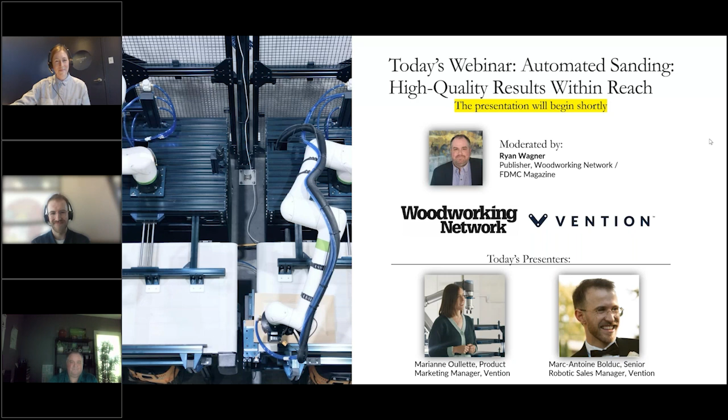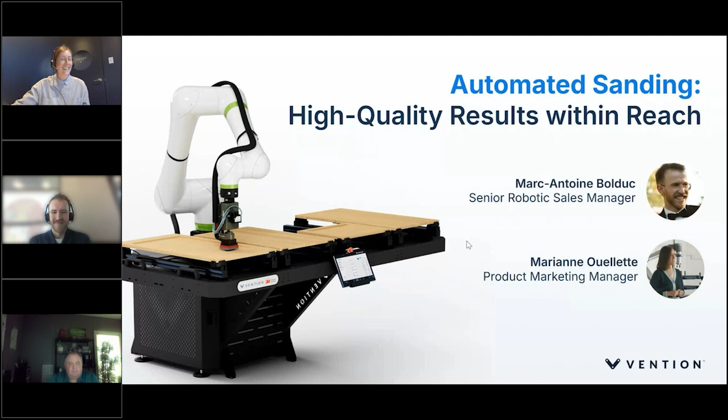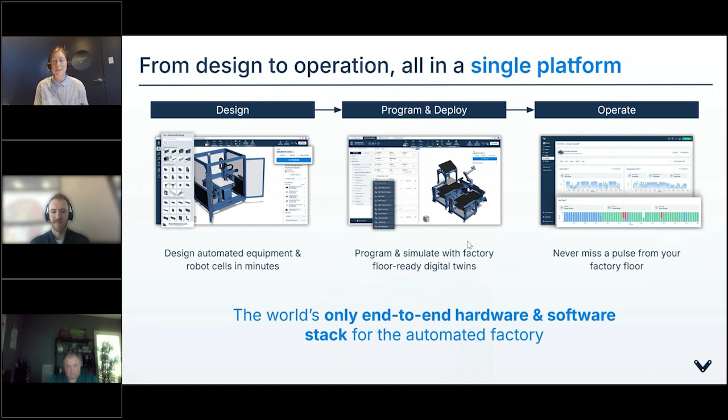Before we dive into it, I just want to take a minute to introduce who is Vention. Vention is the world's only end-to-end hardware and software stack for the automated factory. On a single platform with Vention, you can design automated equipment, program, deploy, simulate, and operate. Vention's mission is to democratize automation and make it accessible to small to medium-sized manufacturers, as you can see on this screen, some examples. The versatility of our platform allows us to now serve more than 25 industries and have over 18,000 machines in the field.

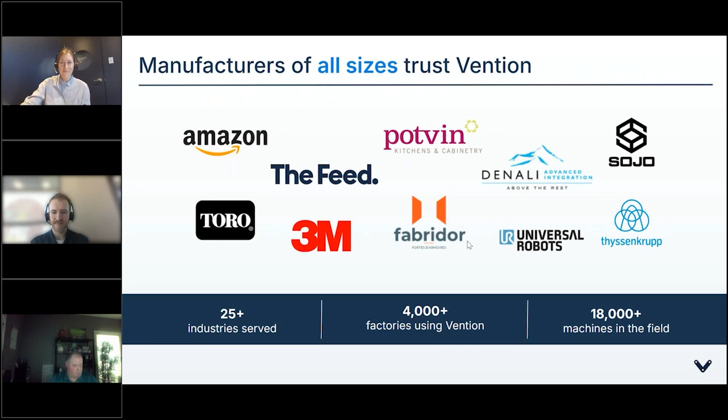Our goal today is to show why automated sanding is essential, demonstrate that it's accessible, and explain how it solves real challenges faced by cabinet makers. We'll first dive into the challenges of manual sanding. Then we'll go over what is a robotic sanding system and what are the business benefits for you. And then, my favorite part, real world examples where you'll be able to hear and see the concrete impacts of robotic sanding on a cabinet maker. And of course, we'll end with a Q&A where you'll be able to ask myself and Marc-Antoine any question you have.

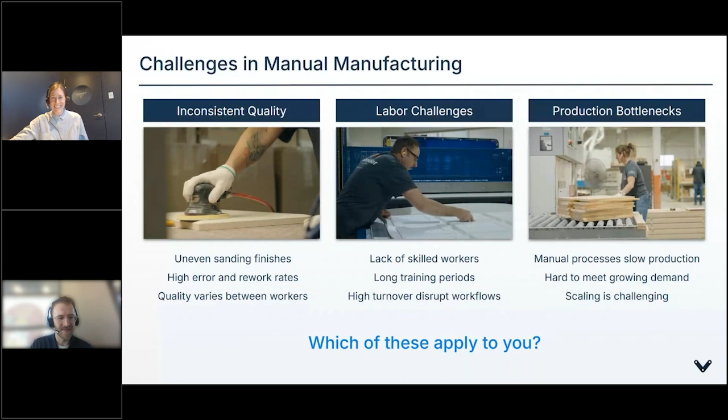We'll now go over the next slide. All right. So how does automation address those challenges? Well, with automation and robots, those are programmed so that the outcome is always the same, which inevitably leads to a standardized quality. Automation and robots also always go at the same pre-configured speed. Hence, the efficiency of the machine and of the sanding process is drastically impacted.

One example of this is Fabridor, for instance, which we will learn more about in just a few minutes. But their initial priority was to automate sanding because of quality. But by automating sanding, inevitably they ended up being more efficient. They reduced their headcount in their sanding department by 50%. And with that being done, they also increased the production throughput per day by about 31%.

And then finding people to do manual jobs is getting harder and harder. With the baby boomers retiring, the new workers who are not interested in working in shops make it tough on labor. So with automation and robotics, finding labor is easier because the jobs that you're proposing are more attractive. Another example, Fabridor, for instance, sanding used to be a department that was almost a punishment. Nobody really wanted to do that. Once the robot was installed and it kept running, it now became one of the most favorite departments. Everybody wanted to go there to operate the robot.

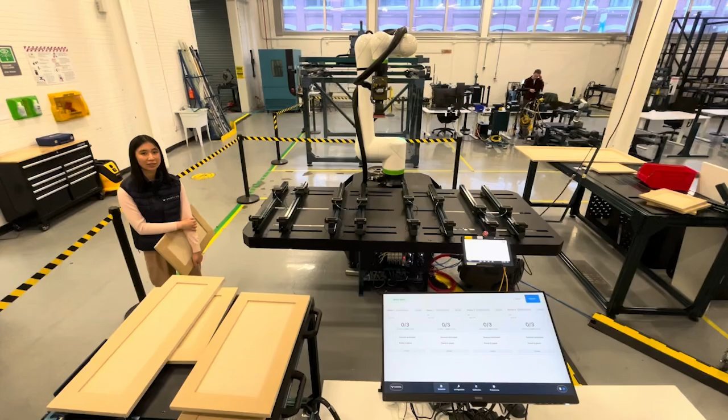What we see on screen right now is the rapid series sanding, which was developed by Vention and 3M. It's one type of configuration where we have a collaborative robot that sands panels and doors.

What we saw earlier was an operator coming with panels, placing a panel on one of the stations. The system has 4 stations for 4 small panels. The lady adjusts the vacuum pods that are mounted on rails, so the pods can slide on the rail. You have one rail that is fixed, acting as the origin position, and then the other rail can slide from left to right.

The fixturing mechanism is made to fit high mix type of production floors, because we all know that cabinet kitchen manufacturers most of the time don't operate in batch size type of operations. It's highly custom, so this is where this type of setup becomes really interesting.

If we take a step back and look at the components part of such a machine, well, you have the robot arm. The arm itself is a collaborative robot. What does that mean? It means that it doesn't need additional safety, so that it can work alongside humans.

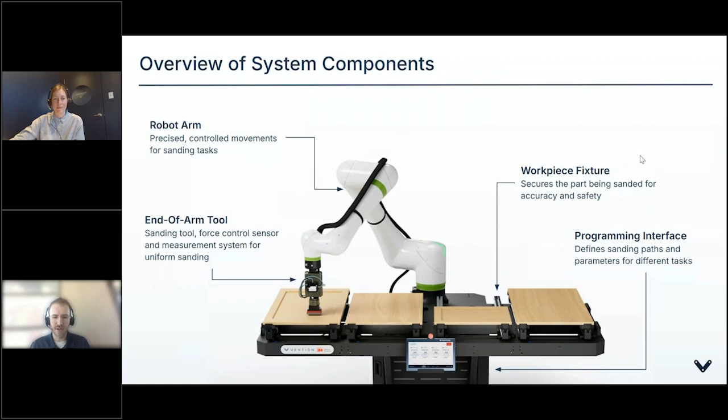Then you have the workpiece fixture that we went over in the video, so adjustable vacuum pods on rails. And then you have the programming interface, which is there to create sanding recipes, so that you can have the robot sand rough doors or coated doors. We'll dive deeper into the programming interface in just a bit as well.

The end-of-arm tool itself, a key component to ensure that a robotic sanding setup delivers constant quality, is the compliance force. That's the pneumatic sensor made by PushCorp. That compliance device is powered by air. So in the programming interface, the tablet, you can input what is the force that you want the robot to apply while doing the sanding.

Then you have a measurement system, which is made by Keyence. It's a laser that pretty much acts as an automatic door dimension detector. So before the robot starts its sanding recipe, the robot will hover over a part to detect what the dimension is. Once that's done, then the sanding recipe begins.

You have a dust extractor that is connected to the sander as well, and then you have an abrasive media made by 3M that is mounted on there. In the programming interface, you will pre-configure what is the surface area that you want the robot to do before it goes into a grit changing position, and have the machine prompt an operator to change the grit.

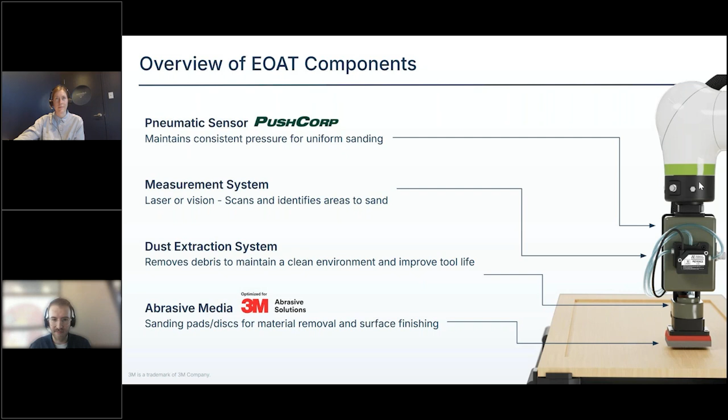This machine is also plug and play, in a sense that the only thing you need to do to power it up is two power outlets, 120-volt power outlets at 15 amps, and one airline supply of about 80 psi. So the system is installed in less than an hour. Once you power it up, you go through the calibration and create your recipes and you're ready to go.

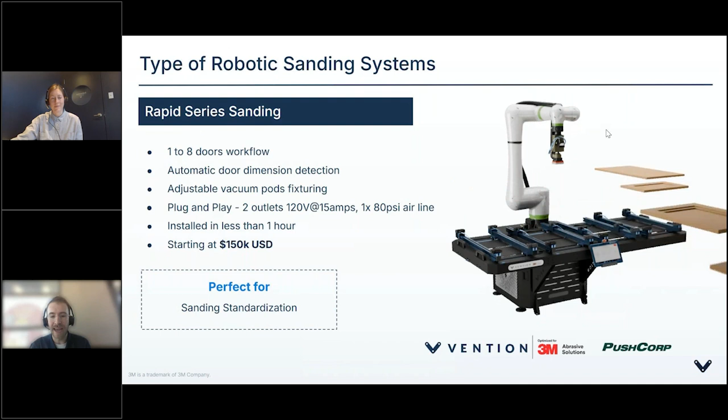This is very perfect for anyone who's looking to get their feet wet with automation, standardize the sanding quality, while inherently increasing operator efficiency.

Another type of configuration is a dual linear line. This is what Fabridor put into place. The workflow is to have an operator at the entry of the line who places unsanded panels. Then the panels are conveyed automatically to the first sanding area, where pneumatic pushers will reference the door. Then the sanding measurement actually begins to then begin the sanding recipe.

Once that's completed, the door is released, brought to the second sanding zone, and the same process goes by to finally have the door conveyed on the outfeed conveyor.

So in a layout where your operations is linear, you have a lot of people sanding manually. This can make sense, whereas the person that feeds the machine can do the inside edges, and the person who outfeeds the machine can wrap up by doing the outside edges, for instance. There are various ways to go about managing your operations, but this is ideal whether you have two grits as part of your sanding process, or if you have a high throughput objective, because both robots could have the same grit. Hence, you'd have two robots simultaneously sanding doors.

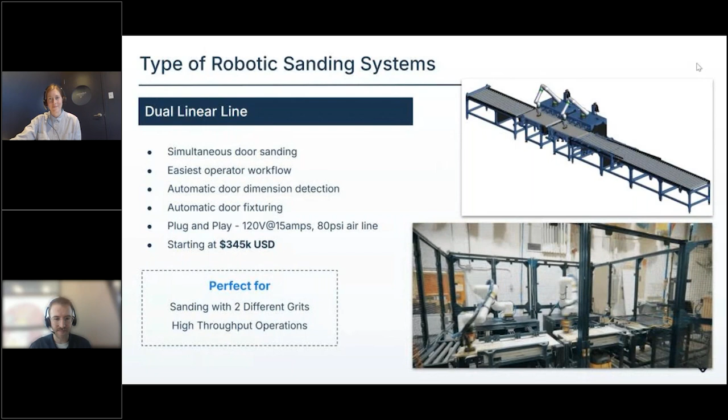Another configuration is a U-shape type of robotic cell. The workflow is very similar to what we just went through, but in comparison, you have just one robot and one operator to feed the machine. The operator can stand and feed the machine while sanding the inside and outside edges, and outfeed the panels that get sanded. This is ideal again for sanding standardization and for any shop that wants to increase productivity per head.

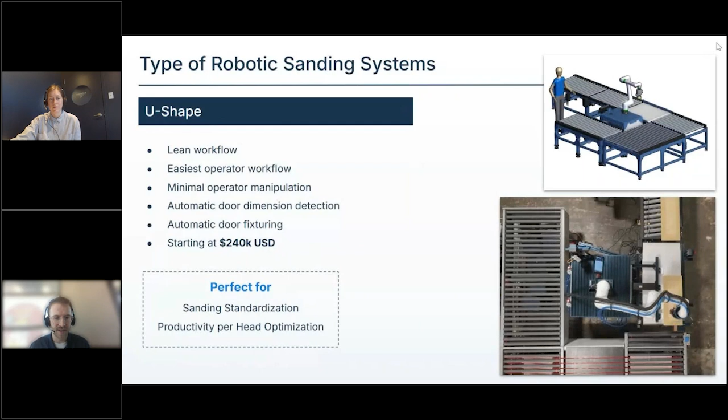And then there are other avenues where robotic sanding could be applied, whether it's for sanding MDF, sanding wood, doing a bit of pick and place, polishing, grinding. That's the beauty of Vention, because we can utilize solutions that are off the shelf and act as a benchmark, and then from there customize to whatever the need is.

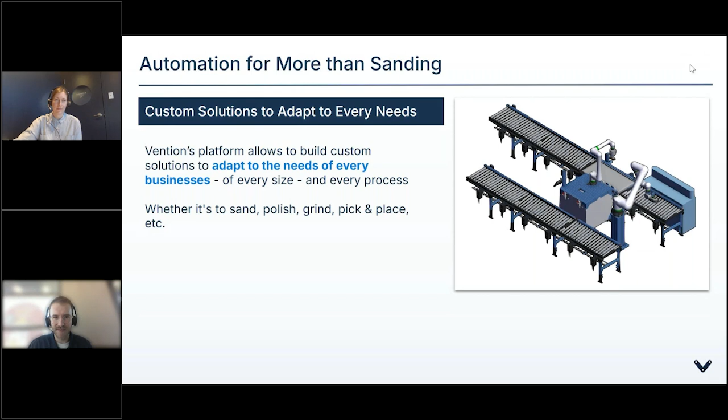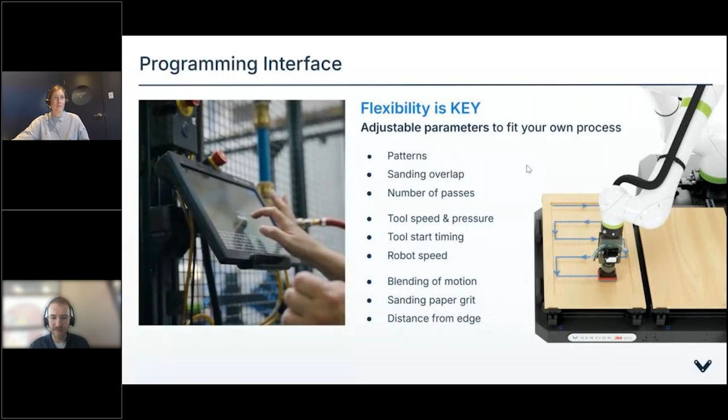Okay, so programming interface. Flexibility is key, because as far as I know, no cabinet or kitchen manufacturers have the same quality criteria. So what Vention has developed is a programming interface to easily program how you want the robot to behave. Let's dig really deep into what steps to go through to get a sanding recipe.

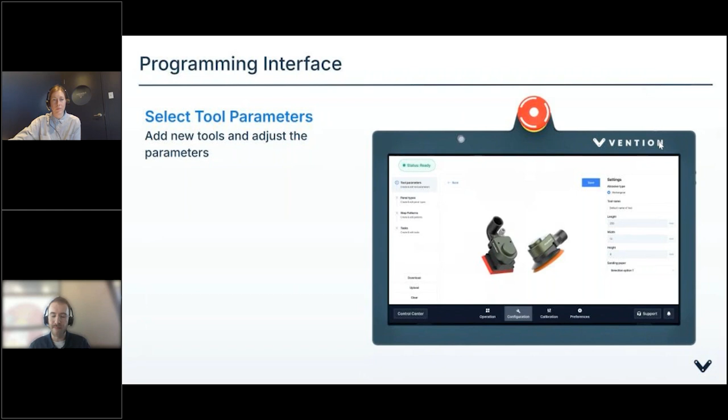First step is to select what sanding tool you want to use. Do you want to use a square one to do the inside pockets of shaker doors, for instance, or do you want to use an orbital one? You select that tool.

Then second step is to select what type of panel is to be sanded. Is it a flat panel? Is it a shaker? Is it a recessed? Is it a raise? You select what panel is to be sanded.

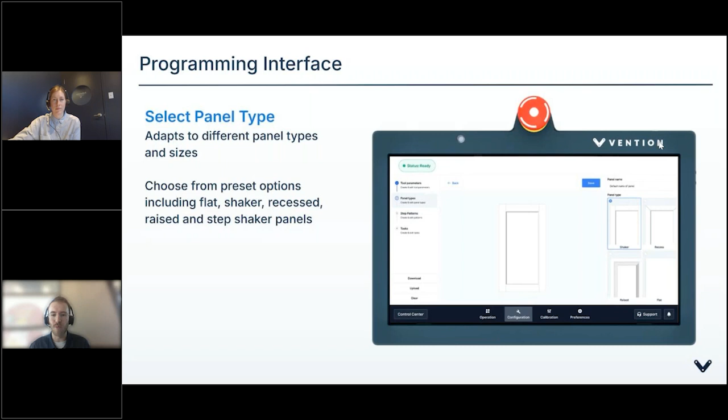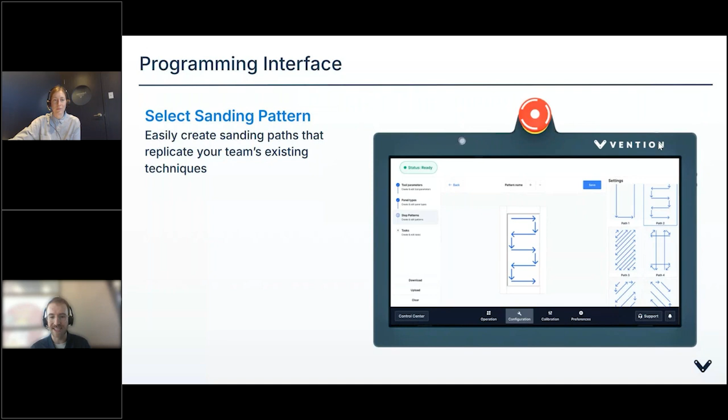Third step is to select what pattern you want the robot to do. Depending on the material, there are going to be some patterns that will give you a better quality outcome than others. You have a list of different patterns that you can select and test. We're happy to give you recommendations based on our experience, but this is where the major flexibility lies.

Then the final step is to create your sequence. You can add up multiple patterns and build your own sequence to make sure that enough blending is made, for instance.

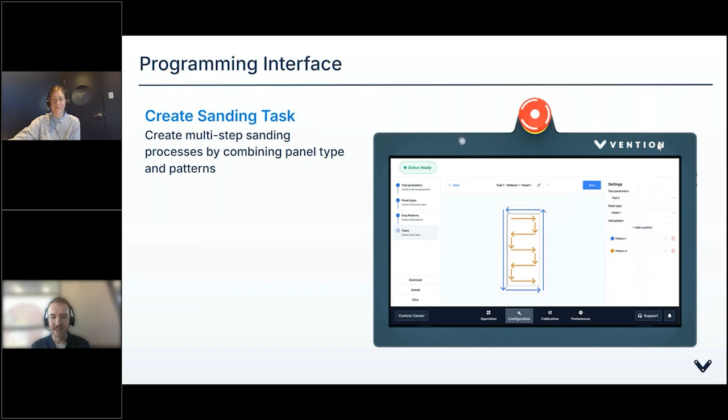And once you have that recipe created, you can have multiple ones. Then you have your stations, for instance, if we refer to the Rapid series, where you have four. So the operator mounts the panel, selects which recipe to run, and clicks start. If you want to stay with that recipe, you don't necessarily have to go back to the pendant. The only job of the operator is to load and offload the machine while the robot always keeps sanding.

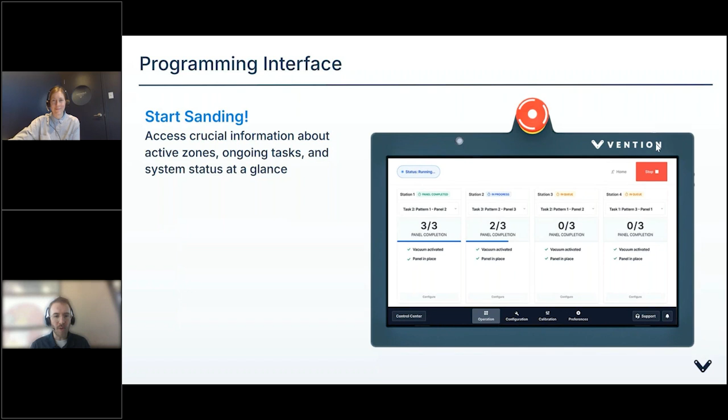All right, so now we're going to talk about the benefits of automating sanding. We went over those topics a little earlier, but of course there are going to be efficiency gains because a robot, from an instantaneous standpoint, will sand faster than a human. Not by a lot if you want to keep your quality standards at a certain level, but over a shift, the robot will end up doing more doors in a day than a human. It's just because it always goes at the same speed. It never stops, it's never hurt. So you will inevitably, whatever configuration you go with, have efficiency gains.

But the quality improvement is, from what we've been told, the biggest game changer here. If you get to a point, and you will inevitably get to a point where you find your perfect sanding recipe, then it's just a matter of making sure that the door you put on the machine is always the same. The robot will always sand the same way.

And ultimately, automating your sanding operations, from someone who comes from an automation background, is a simple project. It is not something complicated. So it's the perfect entry door to get into robotics and further implement robots throughout the shop, whether it's to offload CNCs, offload panels coming out of an edge bander, or whatnot.

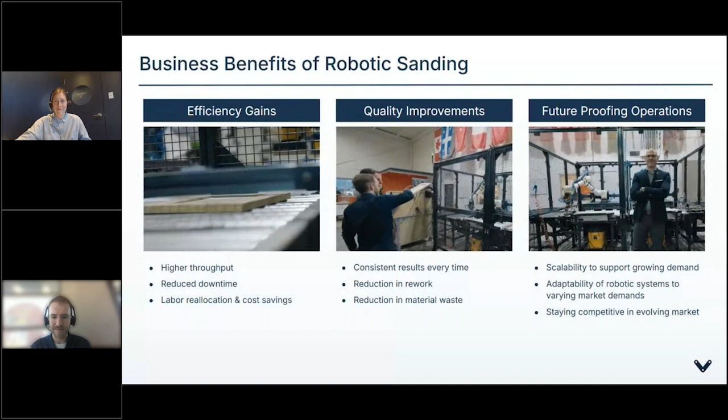All right, real world examples. Those type of solutions are a good fit for both cabinet and kitchen manufacturers. Obviously, the requirements and the objectives are going to be different.

Fabridor, for instance, makes custom wood panels, MDF, and thermofoil doors. They have about 70 to 100 employees, and for them, the dual linear cell is what made the most sense.

On the other hand, for kitchen manufacturers, the product's variability is often a bit higher, which is why other configurations can make more sense. The size of the company and the amount of doors is a big decision factor as to whether the U shape or the rapid series makes more sense. That's our job as well, to help you figure out what makes the most sense.

Awesome. So now that we've gone through these, we'll take a moment to watch a video together. Our customer Fabridor will be explaining what the impact of robotic sanding was on their process.

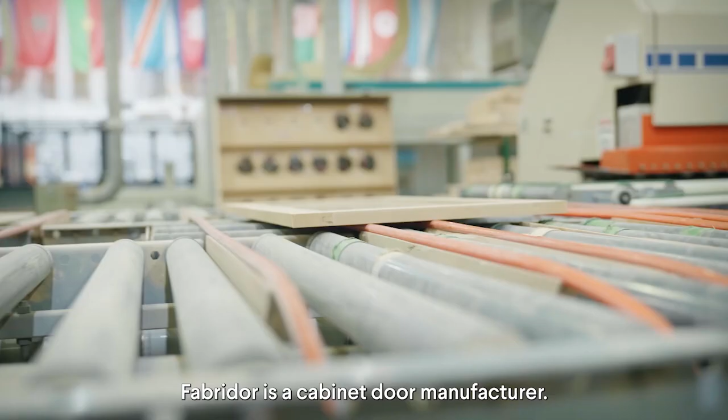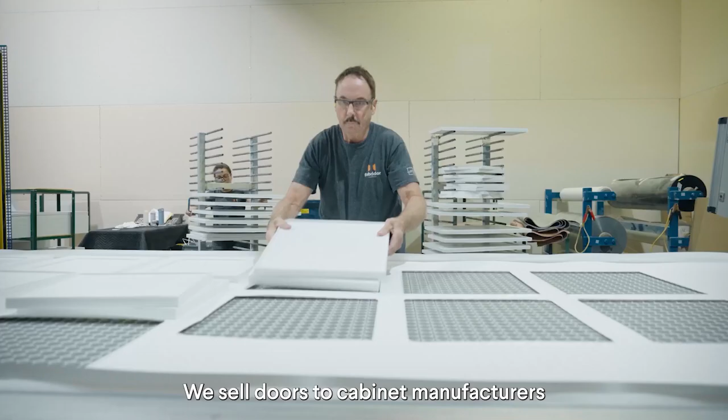Hubert Dubois, General Manager at Fabridor: Fabridor is a cabinet door manufacturer. We fabricate doors out of MDF and solid wood, as well as thermofoil and veneer doors. We sell doors to cabinet manufacturers throughout the entire province of Quebec, as well as part of Ontario and the Atlantic provinces.

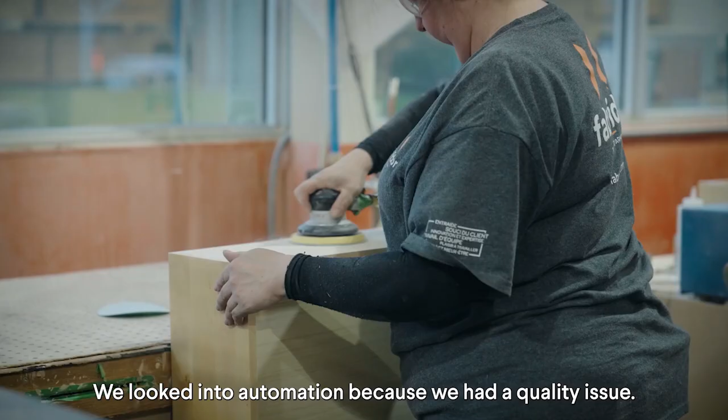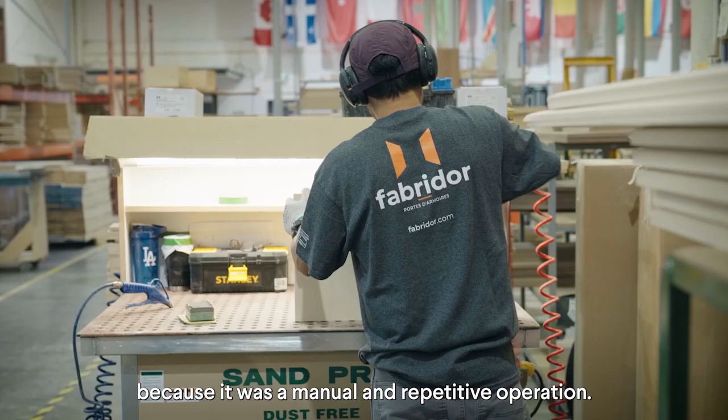We looked into automation because we had a quality issue. We were looking for uniformity in the sanding operation of the MDF door. It's been a challenge for many years because it was a manual and repetitive operation. That's why we went with a robot that doesn't get tired.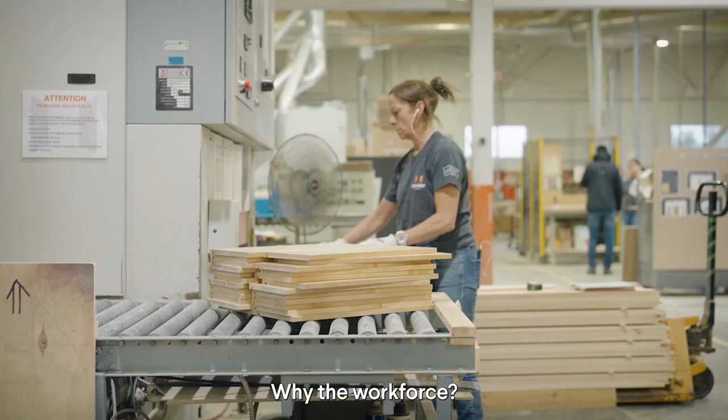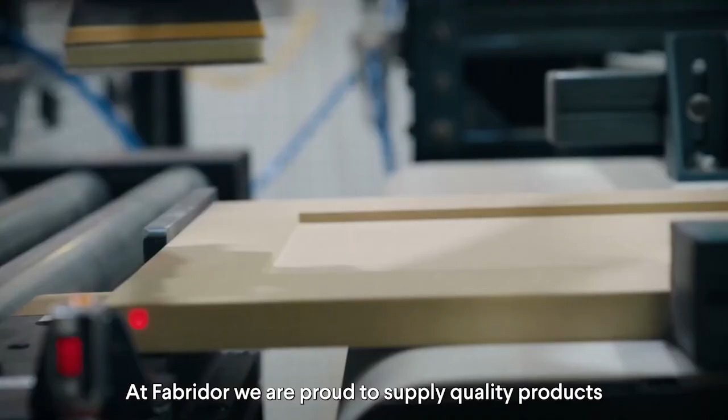At Fabridor, we are proud to supply quality product, and this is why we thought automation was really a solution that would improve the quality of our MDF door. We want to be the best quality MDF door on the market. That's it, no less.

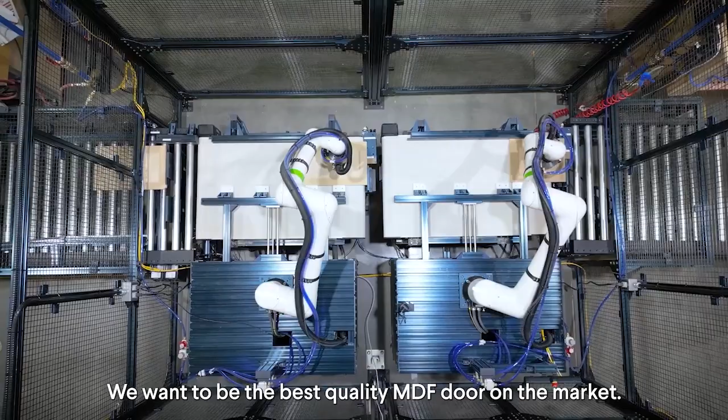We had been in the process of finding an automation integrator for multiple months when Vention just showed up at the door. Every other robotic company we looked into wanted us to write them a check before even starting to look at a solution, while Vention was ready to invest their time with us to find the solution.

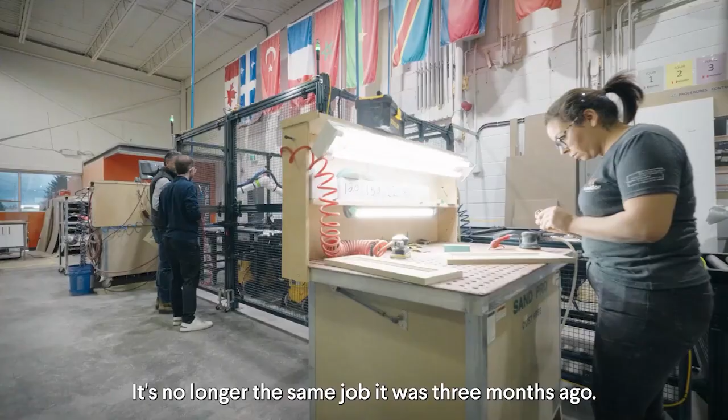The sanding line has been in operation for about 6 weeks now, and we have only received positive feedback from our customers on the quality of the sanding.

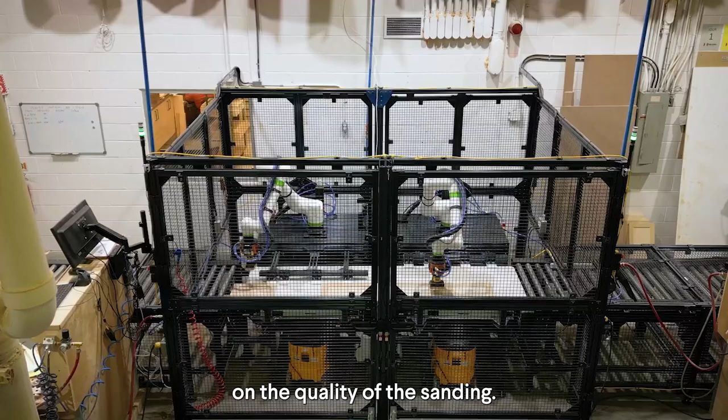At Fabridor, we strive to improve our efficiency, and with the robot sanding line we have improved our sanding efficiency by 31%. We believe that in the next few months we will improve this number up to 35, maybe 40%.

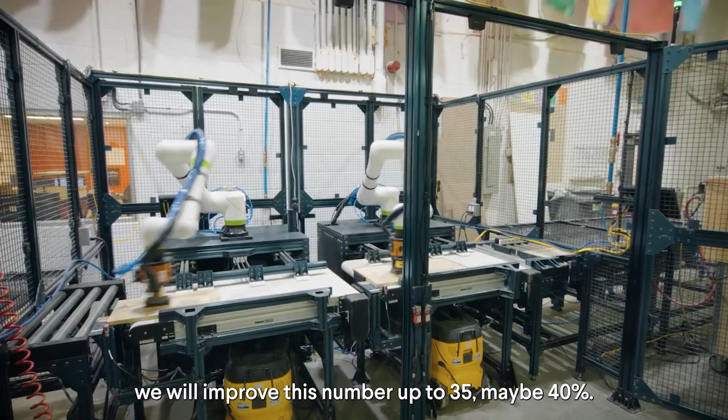Fabridor is really happy to have found Vention and knows that they're a great partner for any automation project coming up in the future.

All right, so we heard it from Fabridor. Obviously, quality, efficiency, and labor shortage were some big factors as to why they started implementing robotics. So I'd be really curious to hear more about you guys, everybody who's attending, to understand if you're facing the same issues or facing other challenges.

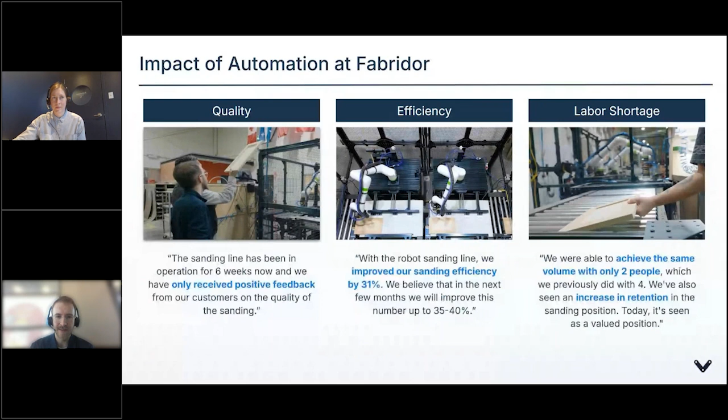It looks like it's now time for Q&A. I saw some questions in the chat. Marc-Antoine, I think you've answered them, but I'd like to ask them out loud for everyone to hear the answer. First question: does the plug and play system also include a dust collection system?

Yes, so all systems we went over can either be plugged into your main dust extractor system, or what most customers do is get an additional mobile dust extractor. 3M has one, for instance, the 3M Xtract dust extractor. You plug that into a 120 volt power outlet, and you need to empty it approximately on a daily basis.

Great, thanks for your answer, Marc-Antoine. Another question here from James: what about edge and profile sanding? Yes, great question.

Some configurations that we went through are only for flat surfaces. For outside edge sanding, this is something we're working on. As you saw, the custom setup with two robots, one for flat surfaces, and then the second one to pick up a part and sand the outside edges with a belt sander, that would be one way to automate outside edge sanding. For inside profile sanding, this is something yet to be automated with robotics. It requires so much craftsmanship that right now there's not a reliable way for robots to do that. This is really where the combination of robots and operators becomes essential. These are not solutions to get rid of operators. There will still be the need for operators and their craftsmanship to deliver the products that define you as manufacturers.